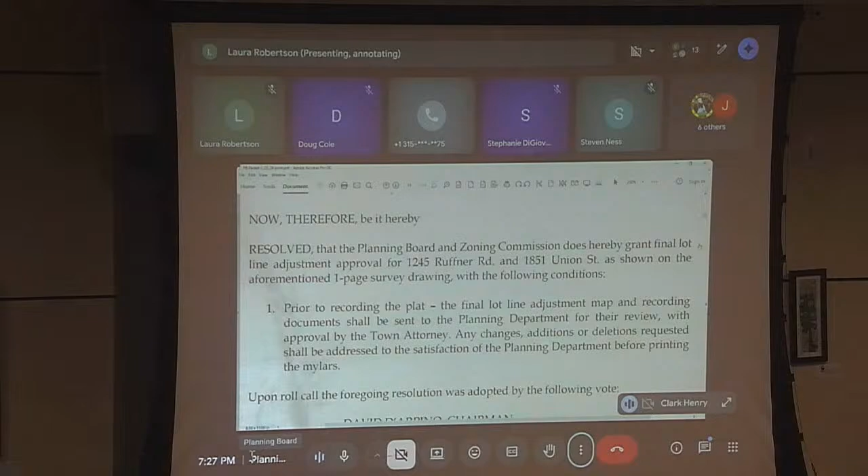Now therefore, be it hereby resolved that the Planning Board and Zoning Commission does hereby grant final lot line adjustment approval for 1245 Ruffner Road and 1851 Union Street as shown on the aforementioned one-page survey drawing with the following conditions: one, prior to recording the plat, the final lot line adjustment map and recording documents shall be sent to the Planning Department for their review with approval by the town attorney. Any changes, additions, or deletions requested shall be addressed to the satisfaction of the Planning Department before printing up the Mylars.

I will move the motion. I'll make it a second. Second. A second by Ms. Gold. Do we have a representative from the applicant here?

Good evening, Brett Steenberg, Steenberg Consulting Engineering. Not much to say, other than we've discussed this for the past few meetings. This is a boundary line adjustment, that's what we're here for tonight. The application stands on its own as such a boundary line adjustment. We believe that we meet all of the standards and requirements to do so, and it's almost a ministerial action in a sense because of its nature, to add the additional lands to the existing lot along Ruffner Road. We're here this evening making that request, and appreciate all of the comments and time that this board has put in for the last few meetings.

Okay, thank you. Open up to discussion.

I have a couple comments on this. I've given this application a bit of thought, and I was unable to be at the last meeting. There's been a lot of talk about lot line adjustments and boundary line adjustments being administrative or ministerial in nature, and some municipalities treat them that way. Our code puts lot line adjustments in the purview of the planning board with specific criteria to review, making it a discretionary action. It's not a ministerial action. We're here to review it, we're here to see if it impacts the character of the neighborhood, among other things that have been discussed.

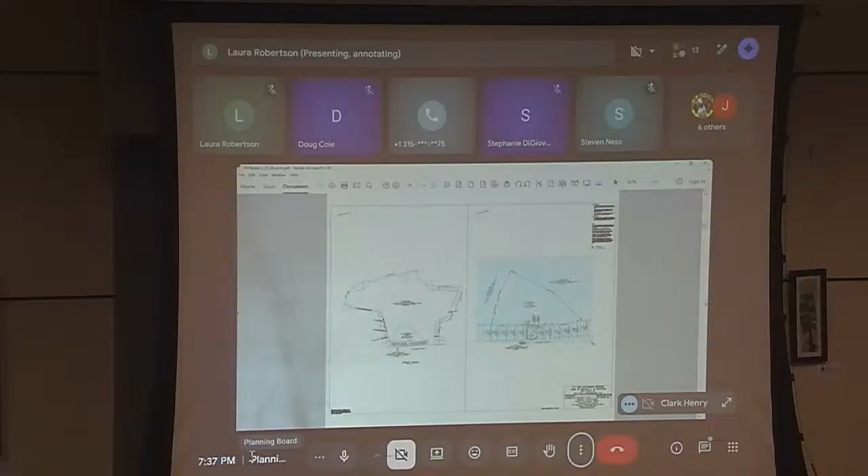And I would note any use other than a single family home would have to come back. Yes, thank you. I meant to mention that anything, any subdivisions, as everybody's talking about future developments, this is just a gateway—it's not a gateway because we're creating a lot. Anything else done to this property would ultimately end up coming before this board to go through all the purview that would be required under SEQR and under planning and zoning requirements.

Okay, any other comments? Mr. Khan could not be here tonight, but he just wanted to let everybody know that he did read the resolution and was supportive of the one condition that's in there. Thank you.

I believe that condition can cover the requirement to add the building envelope. He still needs to add signature blocks and things like that. But okay, you could also make that a second condition if you wanted to.

Laura, isn't that pretty much standard procedure though for when they have to do the application? If it wasn't on there, it wouldn't get approved, correct? Yeah, I have to make a number of changes to the lot line adjustments before they get finally recorded. Just small technical things if they're missing. Okay.

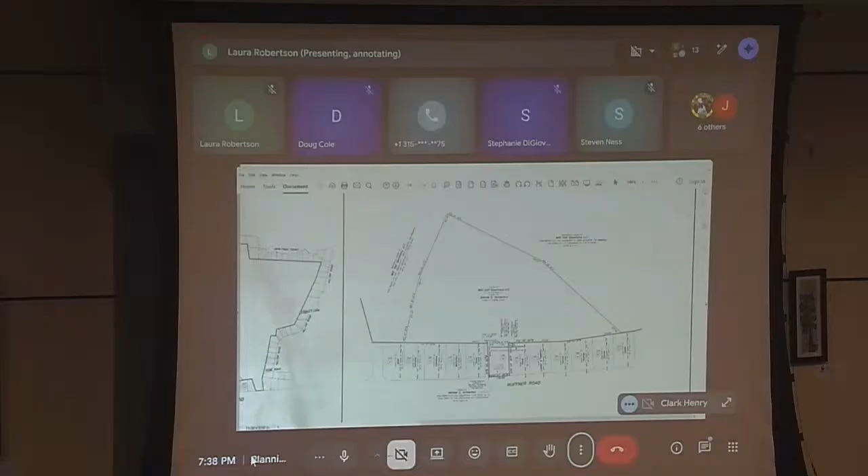Mr. Millspaw, are you okay with the condition as is, or did you want to make a motion to amend? No, I think I know where the vote's going and how I'm going to vote, so I'm fine with it how it is. Okay.

If there's no further discussion, Ms. Bergami, could you please call the roll? Mr. Laflamme, aye. Mr. Bill Calhoun, aye. Mr. Drescher, aye. Mr. Millspaw, no. Ms. Gomes, aye. Ms. Gold, aye. Chairman Darpino, aye. Resolution passes.

Thank you very much. We appreciate your time over the last few weeks and getting this across the finish line. All right.

Next resolution up is 2026-12, a resolution to call for a public hearing for site plan approval of a security center at 2690 Balltown Road, which is GE Vernova. Project lead is Ms. Gold. Now therefore be it hereby resolved that this planning board does hereby call for a public hearing to be held on Monday, March 9th, 2026 at 7:00 PM in the Niskayuna Town Hall, 1 Niskayuna Circle, to consider the application of Matt Savoy, agent for GE Vernova, for a new security center building with parking and signage along the southern side of the main entrance driveway at 2690 Balltown Road.

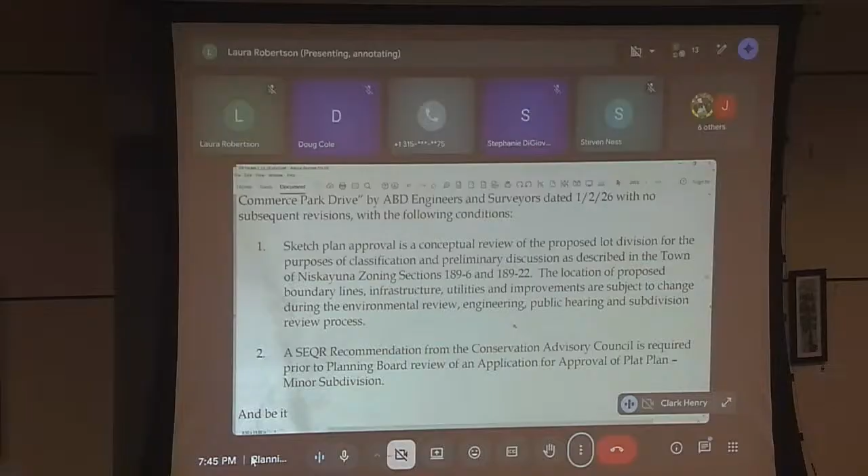1. Sketch plan approval is a conceptual review of the proposed lot division for the purposes of classification and preliminary discussion as described in the Town of Niskayuna zoning sections 189-6 and 189-22. The location of proposed boundary lines, infrastructure, utilities, and improvements are subject to change during the environmental review, engineering, public hearing, and subdivision review process. Number 2, a SEQR recommendation from the Conservation Advisory Council is required prior to planning board review of an application for approval of plat plan, minor subdivision.

And be it further resolved that this planning board does hereby call for a public hearing to be held on Monday, March 9th, 2026 at 7:00 PM in the Niskayuna Town Hall, 1 Niskayuna Circle, to consider the application of Chris Sparagan of 155 Erie Boulevard, Schenectady, New York, zip code 12305, for a site plan application requiring a special use permit for the construction of a 6,000 square foot building for the Montessori Child Care Center at 46 Commerce Park Drive. May I get a motion?

So moved. Moved by Ms. Gold, I second, seconded by Mr. Laflamme. Representative from the applicant here?

Good evening, Luigi Palesci with ABD Engineers and Surveyors. Good, and how are you? Good, thank you. Okay, you had a chance to listen to the resolution, and there's a couple conditions on there. Are you comfortable with all of those? Yes. Okay.

Open it up to quick discussion. I'll just give a quick update. Hot topic on this one has been the TDE review. So we did receive a first comment letter from the TDE this afternoon, so you guys will all be seeing that soon. Okay, great. And there might be a change to the lot line.

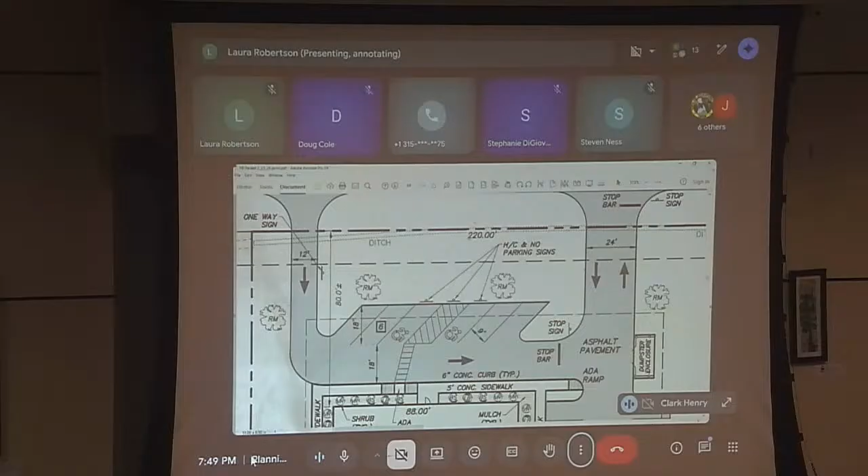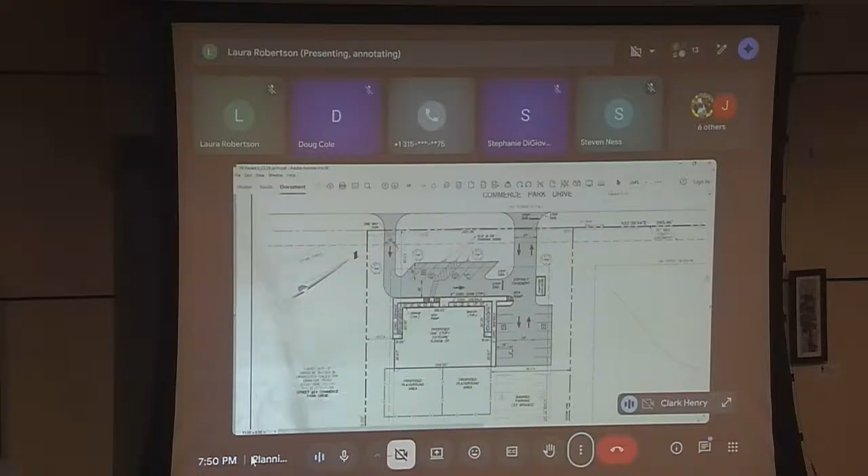We've added additional landscaping around the dumpster. I know we spoke last time about the location of that dumpster. We did look at alternatives, and the only other alternative would be back here, but we didn't feel comfortable putting it back here because if kids are back there around the playground area, we didn't want the pickup truck to come back in that area. So we left it here and thought we'd increase it with landscaping around the dumpster area. Being that it's the end of a cul-de-sac and a commercial area, we hope the board would agree with that location.

We've increased the number of parking spaces as well. So although we had them banked before, we added, I believe, 13 parking spaces on either side, which pretty much takes you in line with this area here. And then we still show the proposed banked area as well.

We went through the calculations. Right now, 56 children with 15 employees, but reserving for the future, if we had 80 children with 15 employees, that would require, I believe, 28 parking spaces. By adding the additional parking spaces now would get you up to like 32. So we're accommodating the amount of parking we need right now that meets the code, but also have additional room to expand the parking lot if we ever needed to in the future.

The utilities, we talked about last time, water and sewer connection to Commerce Park Drive. The stormwater stayed the same, that did not change from what you saw last time. All of it is sheet flow that takes it to the existing stormwater basin to the south, and everything drains via vegetated swales and makes its way to the existing stormwater basin designed for this parcel. Going back, this parcel, lot number 7, was approved for a much larger office building and parking lot, and we're building a small fraction of what was previously approved and designed to go to that stormwater practice. So we're sending much less water to this existing stormwater practice than what was previously approved and designed for.

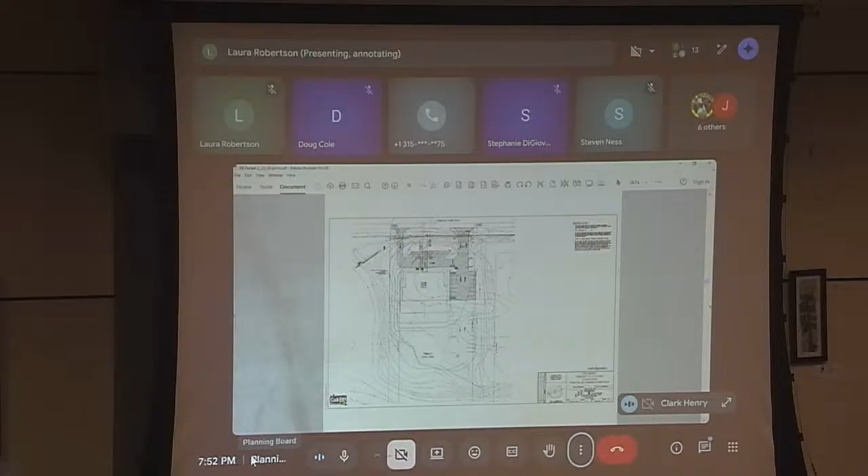Just a few things here, procedurally. We understand your accelerated schedule for this, reviewed with many departments here. I think one of the things I'd like the board to talk about is that the plan we typically have here is the one we move forward with. I know there's been some recent updates. They seem relatively straightforward the way you've explained them, but the increase of parking, reconfiguration, the lot line may just be expanding this a little bit further. Procedurally, if we could see that plan, then review it. I don't know if it's going to change the board's concept of where we're going with this ultimately for the timeline, but it's not just a couple things changing. We have a few things: reconfigure curb cuts, things like that. So I'll just bounce it off the rest of the board.

I don't know if maybe tabling this until the next meeting, just so we have the updated plan. Well, we have it, we haven't gone through it. However, Clark and Trish and I met with the applicants Friday morning and were presented with the plan. So I'm comfortable with it, but I would look to Mr...

Can we amend the resolution to reference the updated plan, or do we have to take another meeting? I don't think you need another meeting. I think you can take action now, but it needs to be clear to the applicant that we don't have the level of review we'd normally have at a public hearing. So you're proceeding with a little more risk than most applicants. As long as your client is okay with not getting the level of feedback we normally provide, I think we can go forward with the public hearing.

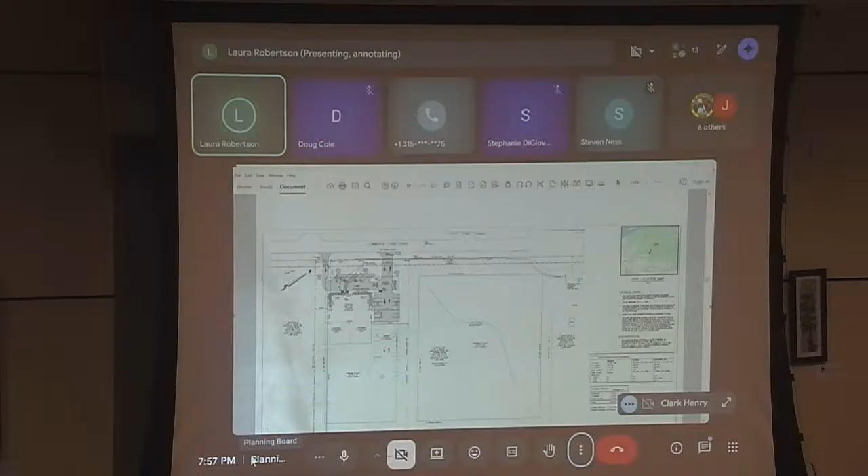I hate to throw a monkey wrench into everything, but several of you are aware the town board knows about this project and is calling their own public hearing. If we're really just focusing on a recommendation to the town board on the use, not the details of the site plan, it would help them if we also had a recommendation on the special use permit only, at the same meeting as our public hearing. So we could be making that recommendation after the public hearing, same night. It would help them a lot if we could do that. Yeah, we would appreciate that. I think the general consensus is that we're comfortable with that, so we'll move forward.

I just want to make sure discussion is not left unresolved. Anything else from the board?

Ms. Regami, could you please call the roll? Mr. Laflamme? Aye. Mr. Bill Calhoun? Aye. Mr. Drescher? Aye. Mr. Millspaw? Aye. Ms. Gomes? Aye. Ms. Gold? Aye. Chairman Derpino? Aye. Resolution passes. Thank you, in a couple of weeks.

Okay, that concludes new business and all the resolutions. Next up are discussion items. First up is 6 St. Gerard.

This is an application for preliminary plat plan approval of a major subdivision. Ms. Gold is the project lead.

Is there a representative from the applicant here? I figured I'd make it official, go sit down and come to you. It was very good, we're going to keep things very official tonight.

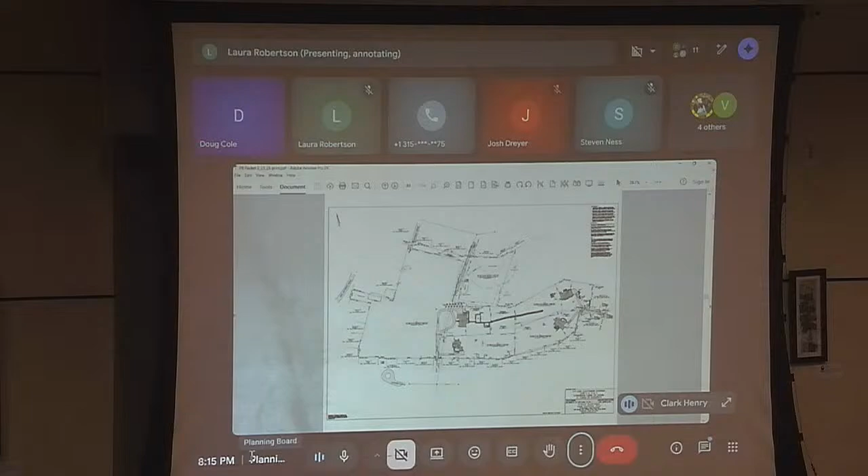And what's come to light more recently, Luigi proved that the existing stormwater piping, which was designed for 60-some homes, has more than enough capacity to take that flow. What has come up more recently is if the combination of all 5 of those lots, if the disturbed area exceeds 5 acres, then the total SWPPP requirement comes in, and they might have to prove that they're not discharging more water post-project than pre-project, but apparently that's less than 5 acres. So that's what's still being finalized between Luigi and Doug of KV Engineering.

So that's kind of the long-winded version of what everyone's been working at. How close is that to resolution?

Doug, can you speak to that? I think it's very close, but Doug, that's probably a question for you. Oh yeah, the information was provided this afternoon, so I'll be looking at that tomorrow and provide comments. And that's the land disturbance map? Yes. And just as we've said, I know there's good reason for people along Row Road to be very interested in stormwater. If anyone wants to stop in, we'd be happy to walk them through the drawings and the different documents that we have. So as Luigi said and Doug said, we're putting a lot of effort in. We know this is a stormwater challenged area, and we're putting a lot of effort into making sure that everything is done carefully. So we'd be happy to walk anyone through that who wants to stop up.

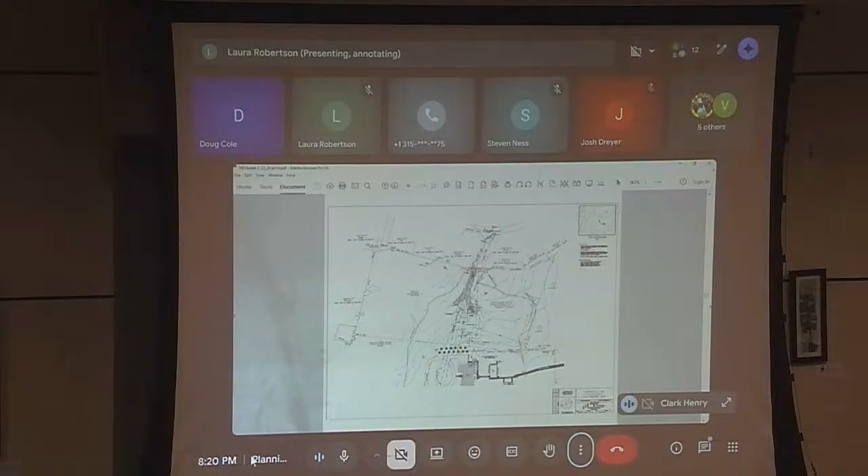Yeah, it was delineated by Kevin Weed, a wetland biologist, and that's shown on the map. Right, this is the delineated wetland here, and then you throw the 100-foot buffer on top of that.

Our clearing is - well, the driveway goes through it. I guess if it is... but there's an existing driveway. We do have to widen the driveway, but there is a gravel pathway that cuts through, and that was done prior to the new regulations DEC put out in 2025.

The 100-foot buffer is still a regulated adjacent area, so if you're doing any additional disturbance in it, if that is state wetland, I think we'd want to see that. I know there's a new freshwater wetland general permit out which probably covers driveways in the adjacent area, but I had thought it was Army Corps - if it is state with the 100-foot buffer, then...

I can confirm with the wetland biologist, but I do believe it is Army Corps. What we did was show the 100-foot buffer in case of the DEC regulation of that buffer. Okay, so if it is Army Corps, then there's no buffer, right? Army Corps - yeah, okay.

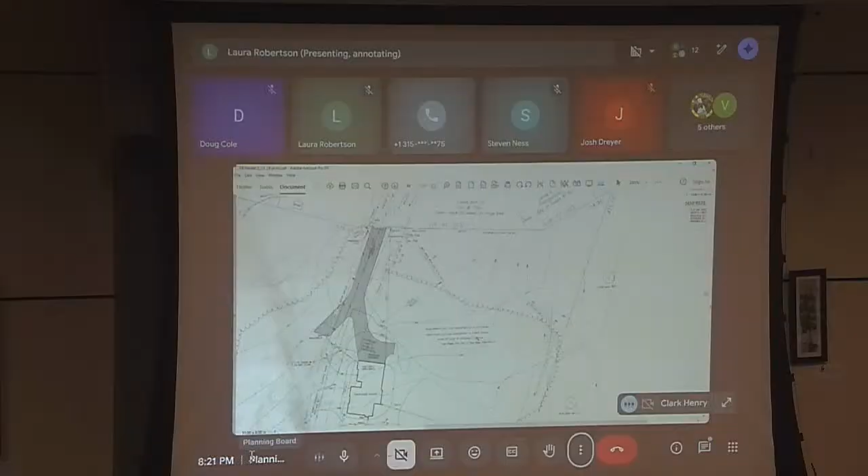So for purposes of us understanding the most recent developments, the new information you're working on that you've shared with Doug - can you consolidate that into a drawing that would show the 4.9 acres, and maybe even color code it, something very simple to understand? I think we've got a couple things we're just trying to close the loop on here.

This is what was sent to Doug, color coded. There you go, as requested. So if we could get something like that with some clear notes from this discussion, I think that would help.

Just one quick thing on that - can you do one with an aerial on it? Because there's a lot of clearing on the left side of that driveway that didn't look like it was highlighted there, and I suspect it's going to be more than 5 acres.

Yeah, when you look at the progression of aerials, there's a lot of clearing on the left side of the driveway coming off of Girard. That would be part of the clearing, I would suspect.

So my understanding of clearing and grading is, if the stumps are removed, that's considered disturbance. But if the trees are just cut and you're not pulling the stumps out, then it's not considered disturbance, right?

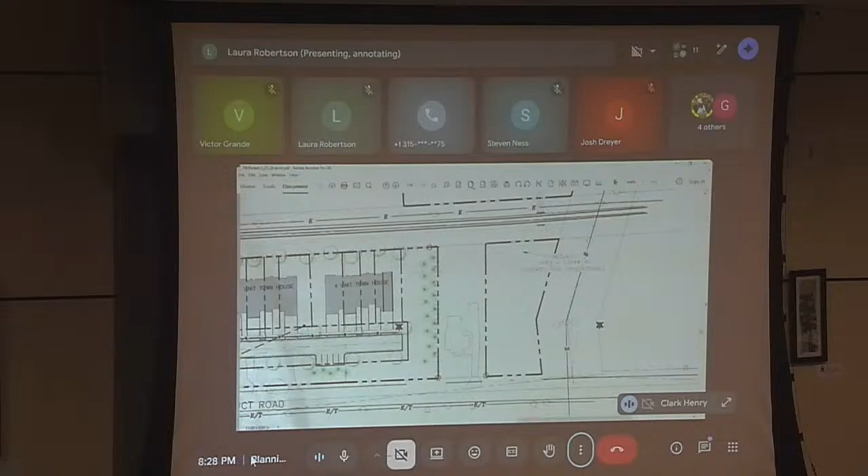The archaeologists were out there and made reference to that, and we've submitted all the documentation to SHPO. I believe we have sign off on the field work, sign off on all field work and the building. So the only thing they're waiting on is for us to move into more detailed design of the buildings for view shed and visuals.

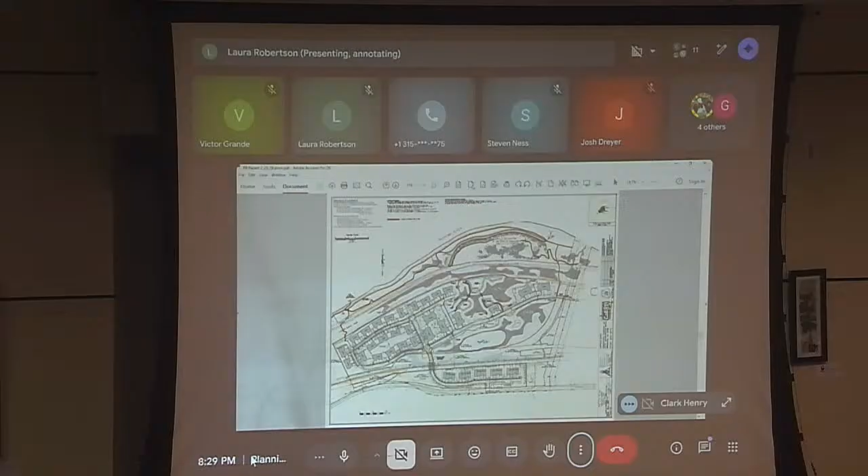Yeah, and with regard to the wetlands, those have been delineated. We've had both Army Corps and New York State DEC on the parcel to determine what wetlands were jurisdictional versus non-jurisdictional. DEC made the determination that these wetlands are not going to be DEC freshwater wetlands, then they turned jurisdiction back over to the Army Corps of Engineers, which requires the 25-foot buffer under the local code, which we've shown on this plan.

We've shown any of the impacts that would be associated with that 25-foot buffer. We show them as wetland impacts because it's the only way that we can do that. And we had a long discussion — we're still under 1/10 of an acre of total wetland impacts on the parcel.

The Corps was actually, when we walked the site with them and DEC, that we were given the configuration of these wetlands, that we were able to maintain under that 1/10 of an acre under the nationwide permit, and how we were able to structure and design the site maintaining this.

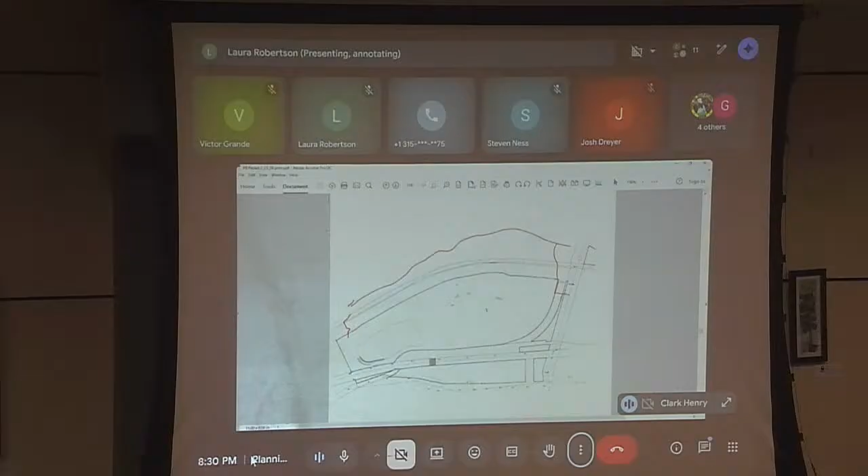So I think, as we've discussed through this whole process, we all collectively, both the development team as well as the planning board and planning department of the town of Niskayuna, have worked together through these meetings, some offline as well as publicly here. And we feel we've developed what we feel is the best possible plan for this development that would benefit both the town as well as the developer, in providing something that is attainable housing, a density that we can make attainable, and offer a housing stock which is not in the town of Niskayuna right now.

You can't get new condos in the town of Niskayuna. And I think that's a benefit in doing all of that without additional infrastructure costs and maintenance to the town of Niskayuna as well. We don't have new town roads, we don't have all the utilities — those will be privately owned and maintained. So we feel from an overall standpoint, from a tax base, from bringing new rooftops, bringing new residents into the town...

...being so close to the city of Schenectady, actually being right on the bike path, which, you know, I know you have employees right here in town who ride their bike to work every day, rain, snow, or shine, and ride that bike path, because it actually becomes a mode of transportation that we don't use a lot in the United States. But if you go to Europe, that's what they use all over, especially in the Scandinavian countries, to get to work and get their groceries. So it gives us an opportunity to provide that and bring that to this community.

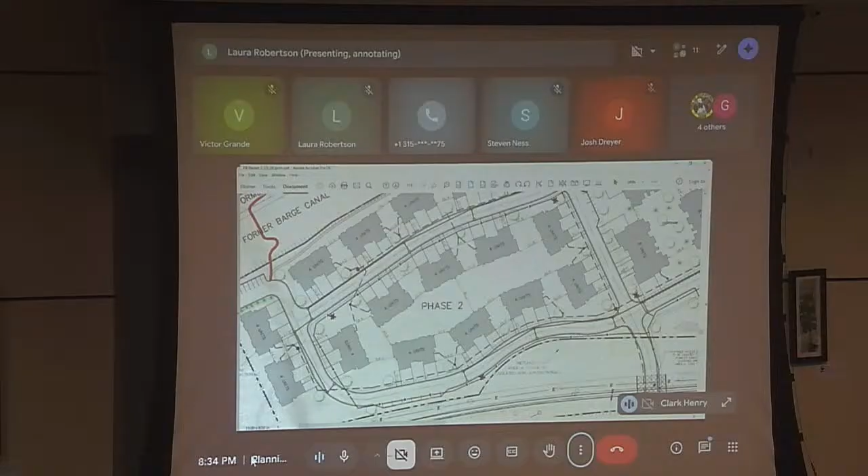You have a good chunk of acreage in the middle there between those houses, where we may be able to get some dry swales, wet swales, or infiltration trenches, depending on the soil conditions. That don't really look like a feature, but are there and are actually operating, which may allow us to alleviate some of the stuff further downstream that you're showing in and around those wetlands.

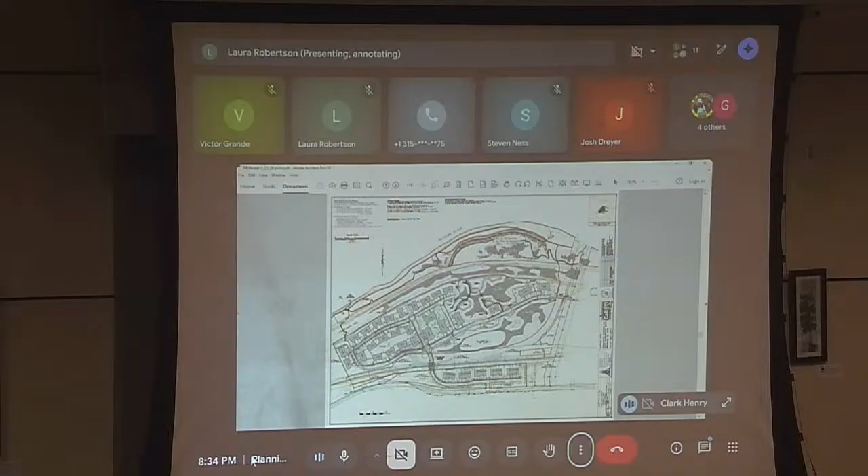Just a quick update on the TDE front. We had a kickoff call, Laura and I, with Weston and Sampson, the engineering firm for this, on the 12th. They quickly reviewed it and gave us a first comment letter on the 13th. It took us a couple days to get it to Chuck and Brett, but we did get that to them on the 18th. So the TDE review process is underway and with good dialogue.

Any concerns raised at all from that? Just the dialogue moving forward? I don't think there was anything major. No, I don't believe so. I think we reviewed the traffic on the last meeting.

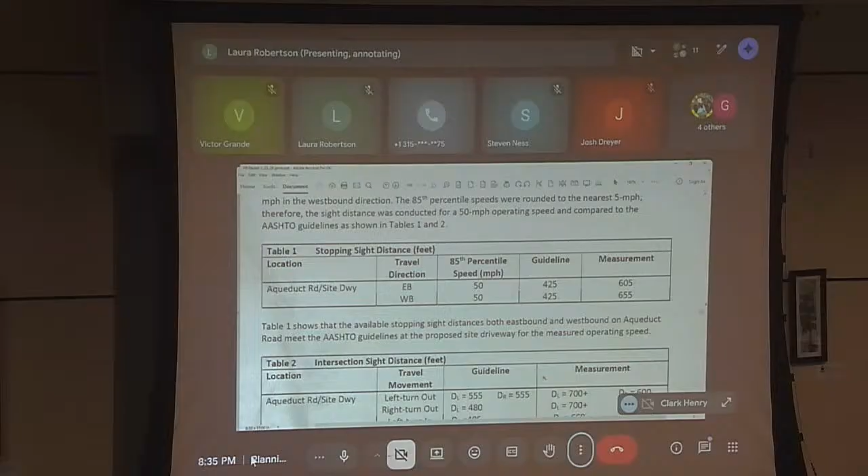I think we reviewed the results of the traffic study, which is impactful, and the comments did include feedback from the experience he lived through with the other development approved next door. But I think we've all concluded that the peak hour would be within the range of the roadway supporting that and its use, and the congestion at the circle. The circle is a huge improvement to the area that allows or enables these types of developments. I think that's how I recall that meeting discussion going.

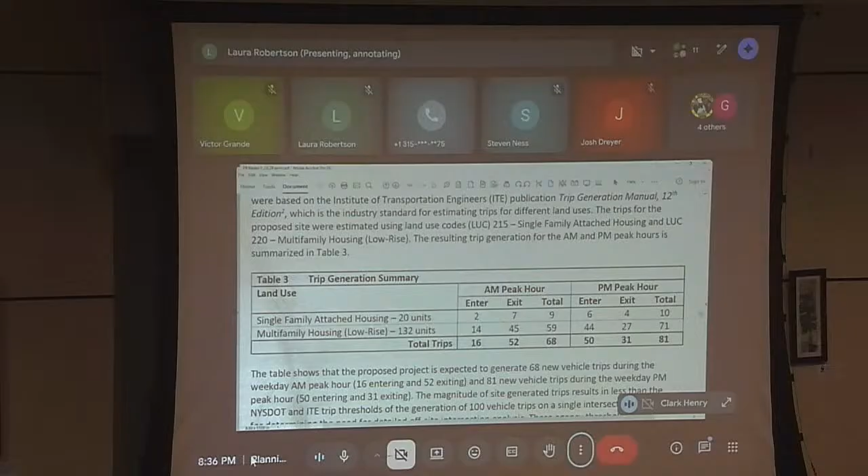Laura, if you want to flip to the level of service, page 15, page 5 I believe. Aqueduct Road stays at a level of service of A, even with the development. As you can see, we have an AM and PM for our driveway that's proposed. So very short delay times, it's measured in seconds.

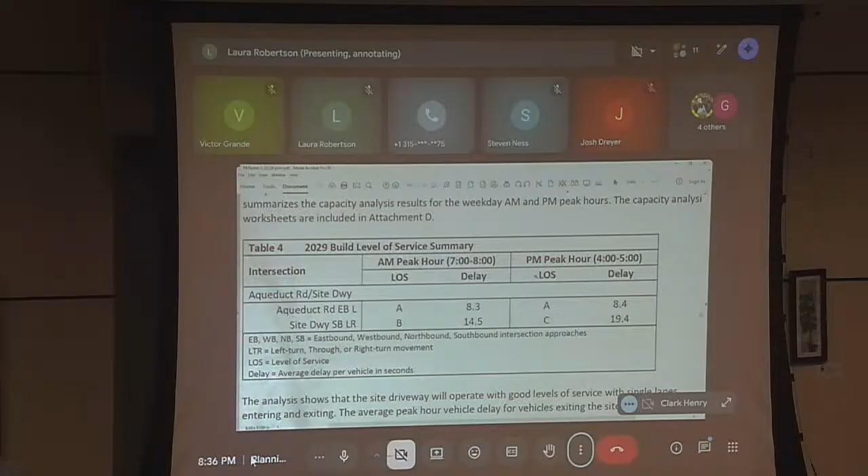What concerns me about the traffic is the impact on the roundabout, because it's already scary. I know some people think it's just wonderful. I've seen things I should not be seeing. So I don't know that we can require you to include that in the traffic study, but I would love to see it, because it just gets very weird out there.

We can have Lansing come to a future meeting for their recommendations, just because our level of service didn't change at Aqueduct and it stayed at A, they didn't see a need to go into the DOT roundabouts. If you were going to see an issue at the roundabout, it would start at the road, Aqueduct Road. But we could invite them to a future meeting when we get into the detailed design to review that further, or if they want to put it in a couple paragraphs, whatever.

I know having them come costs more. But it's a concern, and I think it's a justified one.

I should never see a car up on the railing on the right southbound just before the overpass, and I've seen it. Seen a tractor trailer on its side. Shouldn't see that either, but yeah, that's happened. I think more than once, actually.

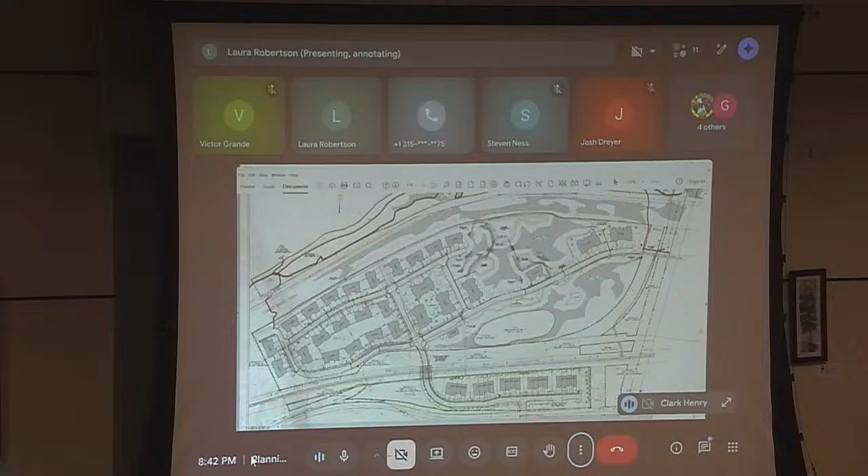I thought we had a huge meter too, right at the beginning of Rivers Ledge where the valve is. We don't have that? No, there's a meter, actually the meter that was installed was between the city system and the town system at the eastern end of Aqueduct Road, near Anthony Street.

Just to go back to the traffic study - reading through it, it says it's basically not that large of an impact there. They talk about the daily trips. I would like to see a little bit more information on that. There's a lot of units here, so those peak hours, I think we should scrutinize a little bit more.

I know Lansing's done their initial evaluation of that, but it seems like when you go through portions of town at specific times, it gets busy pretty quick. This is a major access point in the town, right by the circle, crossing over the bridge, especially with some of those bigger companies expanding and building more. So maybe give them a little more insight as to the future outlook on the Balltown Road corridor and Aqueduct, and have them factor that into their evaluations.

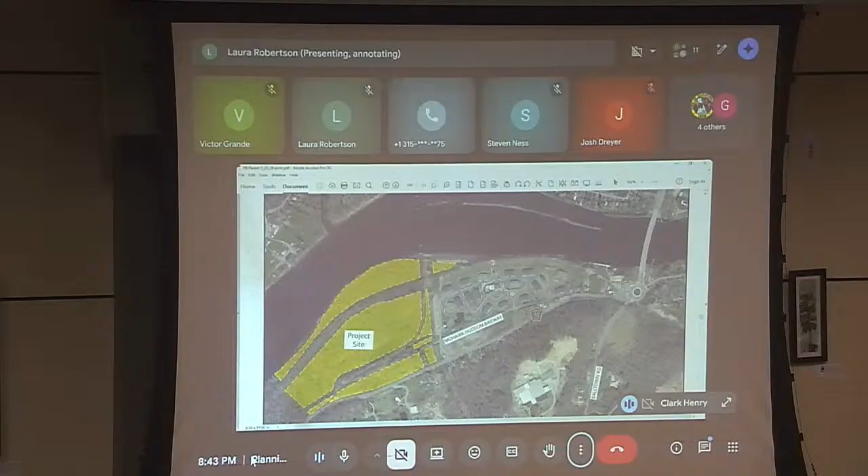And when would you - is it something tonight where Brett and I were looking at SEQR tonight was a recommendation to the town board for tentative zoning approval? Is that something you would like us to dive into during detailed design? Is the level of service outcomes and everything else in the traffic study substantial enough of an overview for today, moving towards a recommendation to town board?

Yeah, I think we're good on the recommendation. It just seems a little underwhelming to me. Traffic, especially with one of these larger developments, plays a key role in everything. It may get questioned at higher levels than us, but we do a pretty thorough review of that. So at this juncture, I think it's fine.

But given the global view of what's surrounding it and some of the other build-outs happening - you're sitting through a lot of the meetings hearing that if another 400 heads come into town at that time, how's that going to affect everything right at that access point? Understood. Okay, all right, good.

So generally, TDE is working through their portion on this. We're in a good place. I have a funky question - should we ask state DOT if they see any impacts on the roundabout since they're responsible for it? Sure, planning could reach out to them if they have contact.

Maybe they might want to make some adjustments. One can hope. I think the roundabout functions very well. It's a bit tricky at times, but there's two lanes going in on some of those entry points, and there isn't on others. So a lot of it's user error - you see it in Malta, traveling through that web of roundabouts up there, a lot of user error.

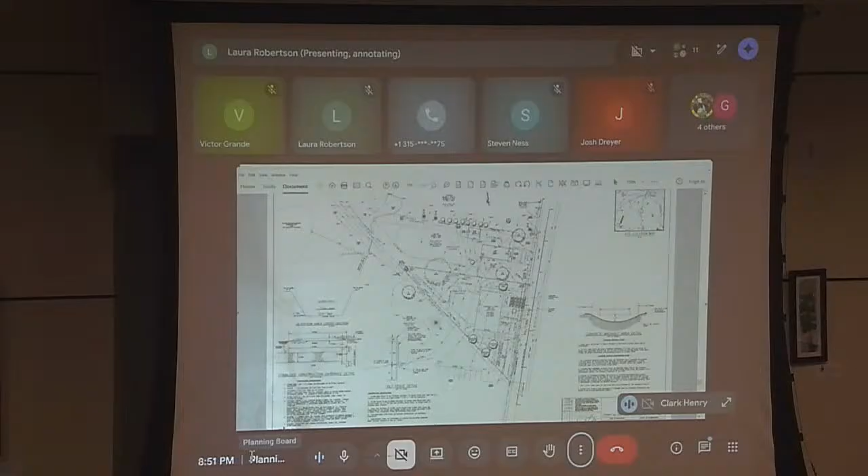It should be pretty straightforward - we've resolved a lot of the comments brought up at the last meeting, and went through the public hearing with no comments. If there's any further questions let me know. I'm inclined to call for a resolution next meeting to approve. I think everyone's in agreement with that, so we'll call for a resolution for minor subdivision approval at the March 9th meeting.

Last item for discussion is 1501 Balltown Road, Niskayuna Tire and Auto. This is an application for updated exterior with Sunoco branding and signage. Thank you for the visuals, Laura. Do we have a representative from the applicant online?

I'm here. Could you just introduce yourself for the record? My name is Deborah Garassi, I'm from Saxton Signs, representing Stewart. Give us a quick overview of what the upgrades are for the canopy and the signage on site.

This is an existing gas station with a service center. Sunoco has rolled out their new Centennial image over the past couple of years, and this site is due for an imaging upgrade per the contract. Looking to upgrade the canopy fascia - the checkered pattern currently on there is their old image - along with the two dispensers under the canopy and the monument sign, also called the main ID sign or road sign, which would also be updated.

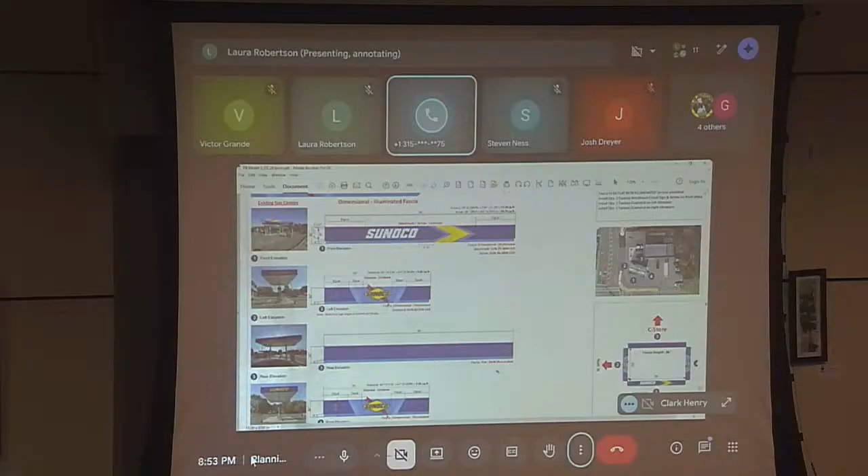Currently there's no lighting - it's all flat fascia on the canopy. The new Centennial image is just a cleaner look; it gets rid of the old Horizon slashes and checkers from the old NASCAR image. As you can see in the drawings in front of you, it's a cleaner look with solid fascia. The canopy also has eyebrow lighting that goes around 3 sides, along with the Sunoco word mark, arrow, and diamond logos which are illuminated as well.

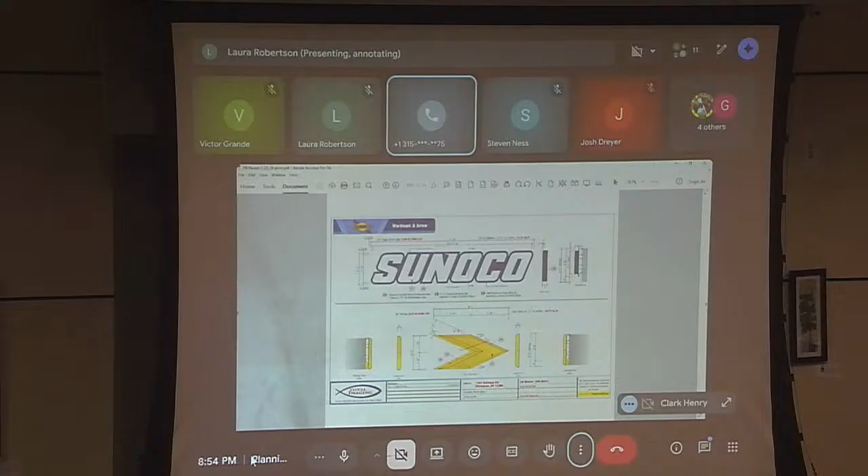And for the monument sign, there were two options: keep it basically like for like, as a placard which is kind of old school, or upgrade it to the new LED pricer, which would be illuminated as well.

And it looks like on the page for the branding of the C-store, well, we call it a C-store, but it's actually in this case a building repair, full service center. There are 2 existing Sunoco signs on that building, and Sunoco is proposing to have those 2 building signs removed. And the 2 dispensers under the canopy, that's pretty explanatory. With the pumps, we would re-image the lower doors and the valances, or some people refer to those as the bonnets on top of the dispensers.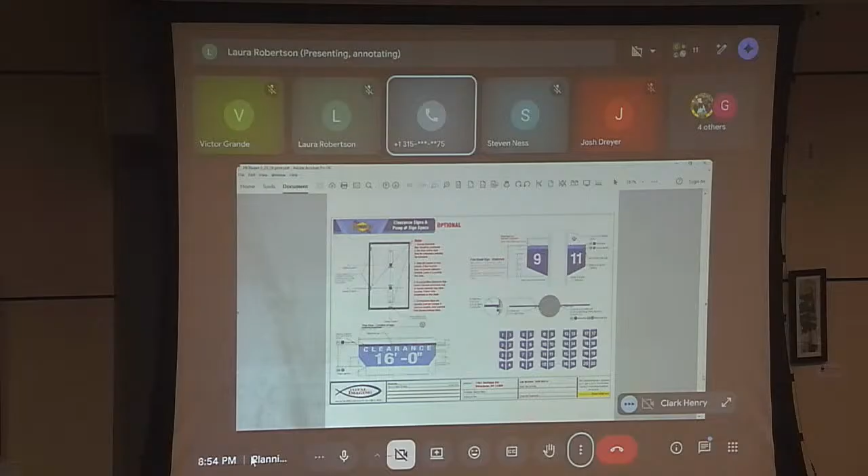Okay, thank you. So this is in the town center overlay district. There's going to be some waivers required for some of the signage there. We'll start with the monument sign. So the monument sign has an issue with being, I think, a little too close to the road. Is that correct, Clark? Yes, it's in the same position as the existing sign, but it is too close per code. Considering where the infrastructure is, and the visibility, I think generally it's in a good location. The size is not significantly changing, going to the LEDs and the simpler logo, which kind of blends with the rest of the color scheme. That would be something we'd have to issue a waiver for.

Is the size changing? The logo is considered - we reviewed this closely with the building inspector who handles a lot of this. The logo would be measured from the tip of the arrow, both ends of the red arrow, and the right and left side of the yellow diamond shape. I was just getting at the actual physical brick and what's on the left of the page - is that dimensionally changing? I don't believe so. Just the images on it. It just looks like it's changing. So that sign is staying the same size, correct, Deborah? That is correct. Square footage, that is correct. I know sometimes when they impose it, aesthetically it doesn't look that way, but it is all maintained. For all the changes, we're maintaining the existing structures and the square footage.

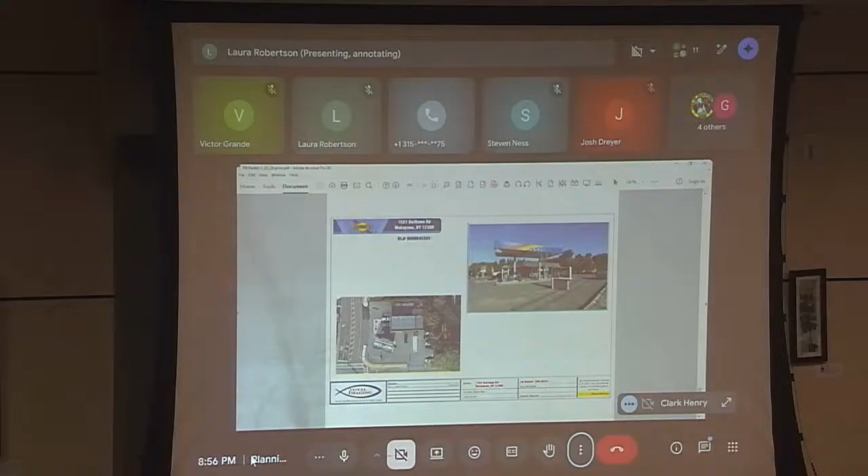And then the next waiver that would be required would be for the canopy signs. Because of the number of frontages they have, grouping all of those together, the front elevation is good. The left elevation would exceed the amount of square feet, so that would have to be 100% for the logo, which would be number 2. Number 3 doesn't require one. Actually, Laura, could you go back to that? Yeah, that's perfect. Just to add a little clarity, if you remember, in the town center overlay district a logo can only be 30% of the sign area. So because some of these signs are exclusively the Sunoco logo, they need a waiver for 70% additional logo area. And then where sign number 4 is, that would also require another 100% logo waiver.

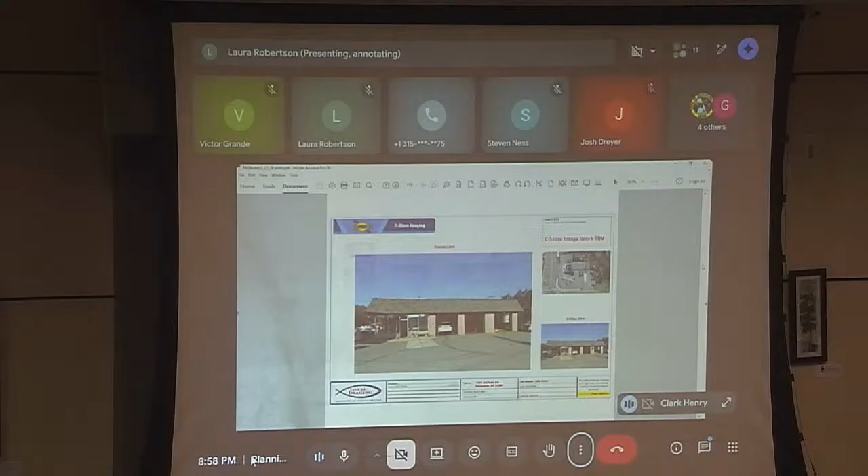And then, like you stated before, cleaning up the building, removing the 2 signs that are on the building itself. Personally, I like the color scheme, I think it's a cleaner look for that area. And then if you could leave the tanks up there as well.

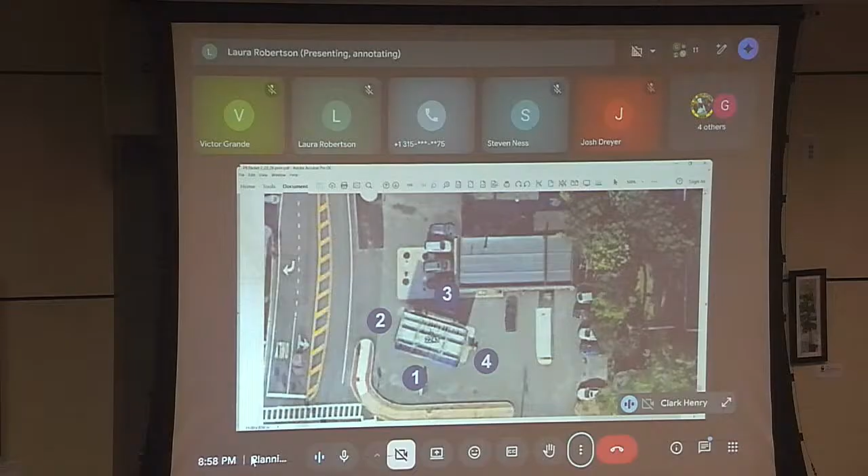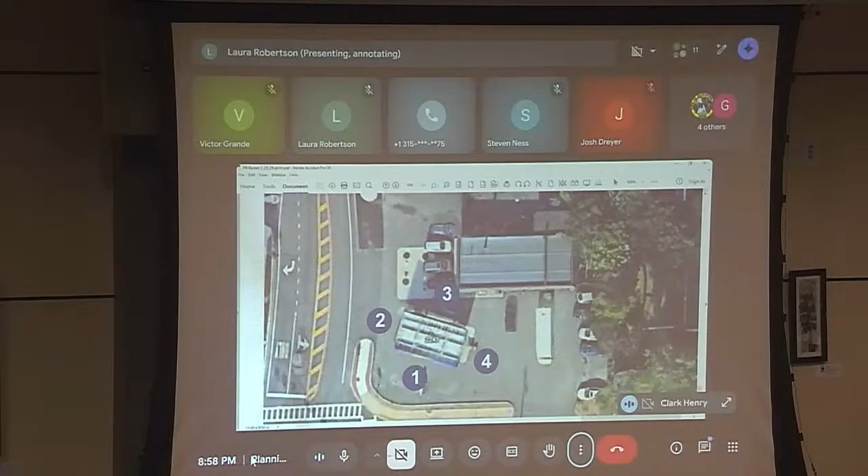Dave, could you just go back? Oh sure, just for clarity on the canopy, the facade on the right - if you go back maybe one more, Laura - where you show position 4 there, we said that really doesn't front anything, so we just put down that you would give it a waiver for having no frontage. 2 clearly fronts Nott Street, 1 fronts Balltown. 3, there is no signage on that, it's just coloring. So for 4, we have a waiver in there for a facade sign with no frontage. Okay, all right, thank you for the clarification.

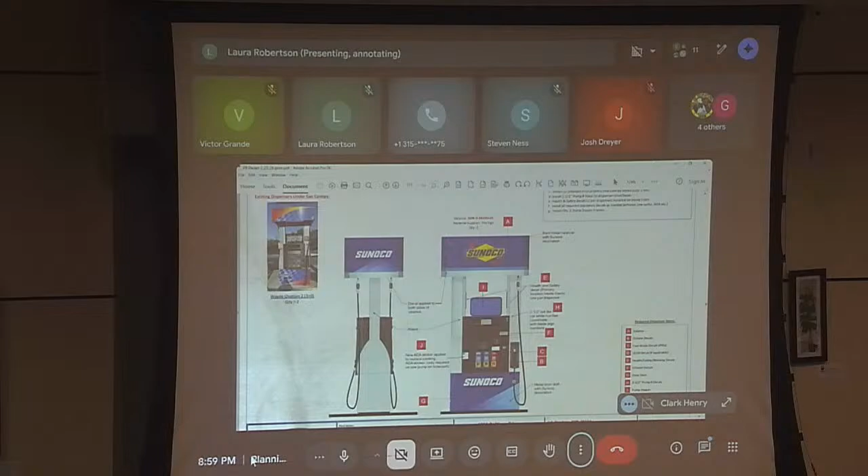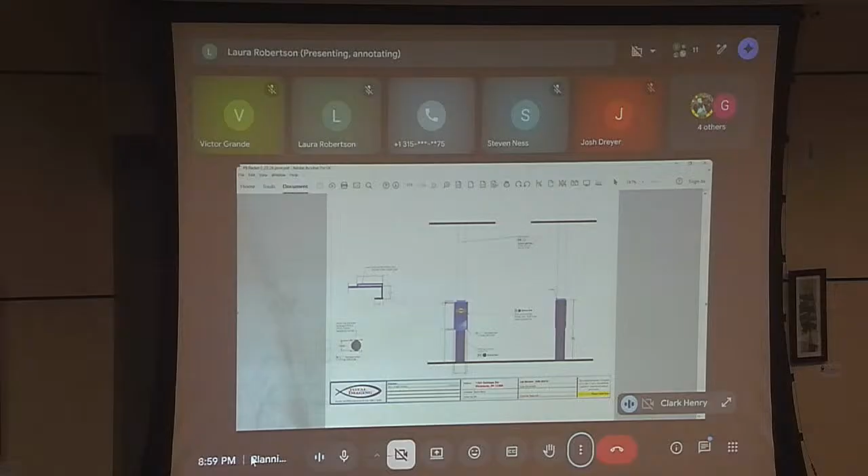And then looking at the gas pumps and the logos that are going on there, also compared to the original ones, cleaning up the color schemes on there. And it looks like the addition of very minor blades that would be added, I think there was a picture, if you zoom out just slightly. Yeah, for the pump IDs. Yeah, the pump IDs are very small in size as well. No, there's another one. Yeah.

And this is just strictly signage, there's no change in products or anything. The pump ID numbers are also small, I call them - there it is right there. Oh, perfect. Small flags that actually correspond with the size of the pumps and are small in nature.

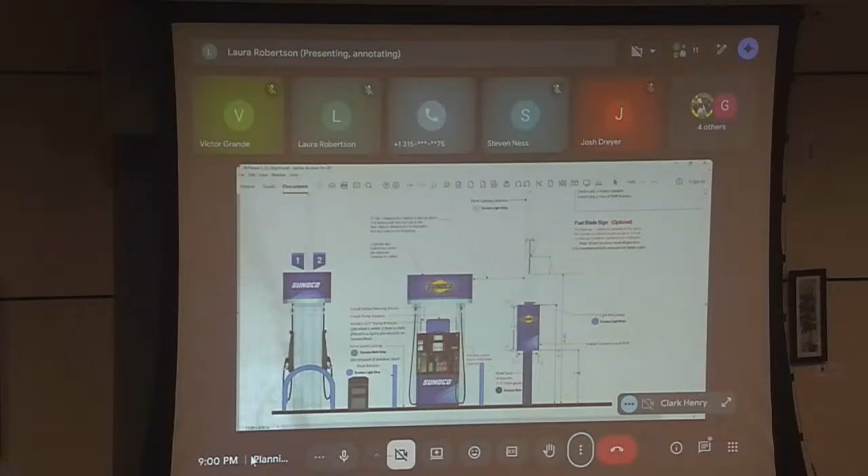This is all actually very similar to what happened to the gas station on State Street recently, within the last year or so. That was all rebranded similarly. And having the pumps identified by number is becoming an industry standard, because if you're going to pay inside, you need to be able to identify the pump you're going to use.

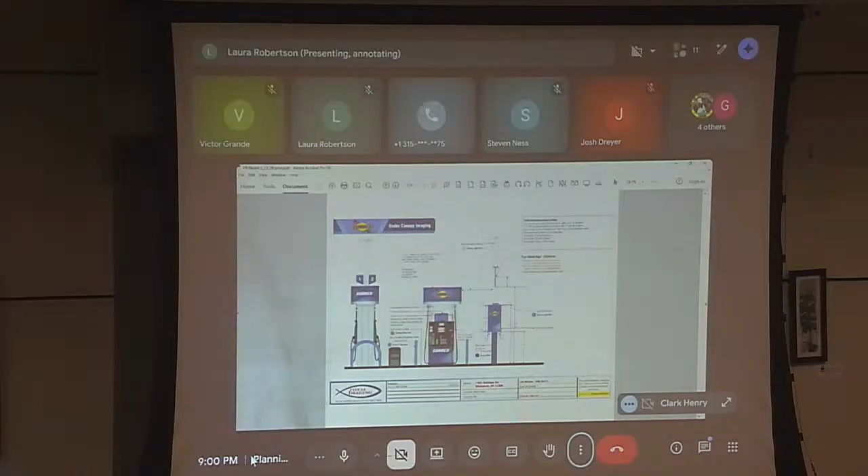So in our packet, we had basically 5 waivers that we discussed that would have to be granted - there it is right there. So, location of the monument sign back from the street, the waiver for the gasoline service, which is the 30% of the sign area, proposes 100% logo. And then the others are for the facade signs collectively that we just looked at, labeled 1 through 4.

So, any thoughts? Does anybody have problems with these? No, I thought it looked much cleaner than what's there. I wasn't sure there was a difference. I'm trying to ask, is there any way we can just get it done tonight?

I mean, it's not typical that we do that, but we do have the ability to pass a resolution if we choose to - be one less thing to have on the next agenda. Right, that's true. Okay, I wouldn't recommend doing that. What'd she say? I wouldn't recommend doing that. Okay, I don't, yeah, yeah.

I appreciate it because I think the Clerk and I can do a very clear resolution for the record, especially because we're doing waivers, so we can write them out and then the record's clean. Yeah, it also just establishes a precedent that we may not want to do - we can't pick and choose applicants, get the green light.

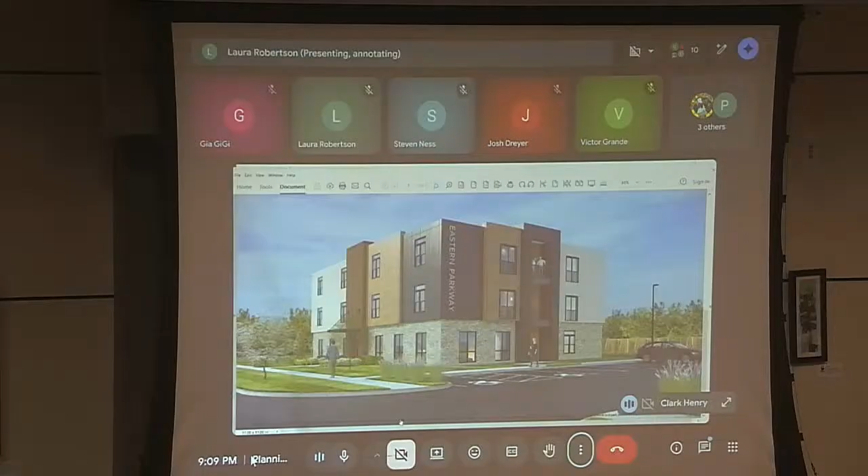Okay, any other comments from the board? I just would add one more.

I think the last building that was done on Union is Homestyle, I think, and they have a lot of clean lines, dark colors. It's just the elevation isn't as high, so maybe it doesn't stick out as much, but it's in the same vein of that kind of modern look and the clean lines. To me, I feel like that's probably where we're going. It's one thing to have a personal taste, but I don't think that's really the place for it. I think a lot of the designs are moving towards this, so even referencing that, it doesn't stick out as much. Obviously this one is larger, but it does have a similar look. Okay, thank you, all right.

All right, so I think what we'll do here is we'll just do a quick yay or nay vote for the presentation for the elevations that we have here for Eastern Parkway. So all in favor of the revised outside facade, state by saying aye. Aye. Any opposed? Nay. One.

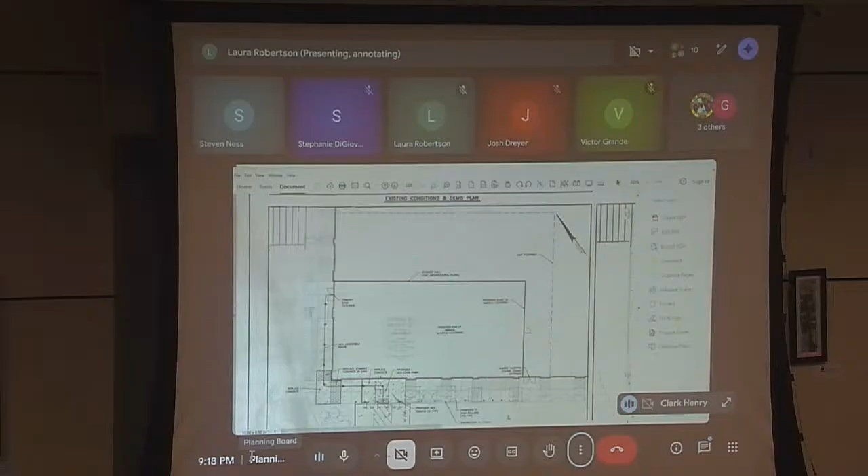So speaking to that, if you remember the wall that creates a corridor on the right, that's clearly shown in the new packet as a demised access corridor that goes to the built part on the left, which would be the Bank of America. But your question about what's happening to the rest of the space is still on point.

That's all I really wanted to know. Yes, that's correct. The space north of us would be another tenant, and that's for the landlord to decide on who's going in there. I assume they're actively marketing it right now.

Okay, hey Clark, how's it going? This is Josh from the landlord side. I just wanted to clarify—Steven said it correctly. We are currently actively marketing that space for other retail users.

That corridor area will be accessible not only to the Bank of America space but also the adjacent space, so there's always an egress corridor to exit from either of those two spaces. The landlord will use one of the heating and air conditioning units on the roof to make sure that area is always heated and cooled. We'll also be building a door, and once you get our plans, which are coming your way shortly, you'll see the whole egress corridor with the door, making sure both spaces have a proper way to exit.

All right, thank you for the clarification. Of course. Okay, good.

All right, so we'll look forward to seeing that application on March 9th. Would you be comfortable with a tentative resolution for March 9th then, based on how we've described that drawing? I think that's fine—it's a tenant change.